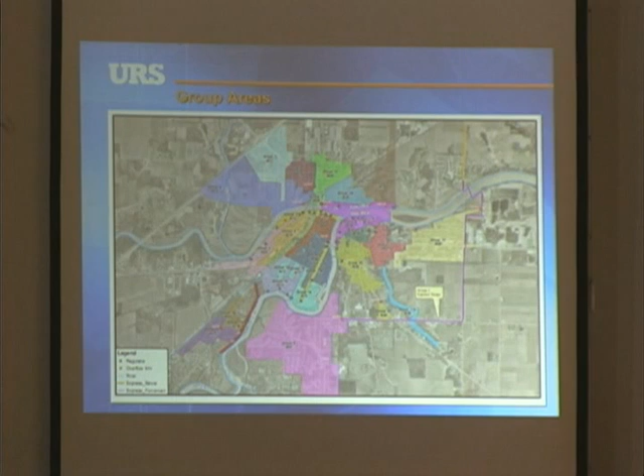Also, it's important to note that about 85 to 90% of their watershed is agricultural. So there's a lot of non-point source that's upstream and adding to the rivers and the pollutants. Simply put, we talked about the cost implication. Anybody that's doing sewer separation, it's very expensive. When you start doing sewer separation, there's all kinds of utility conflicts, there's pavement restoration. They've probably seen about everything you can imagine in the 6 group areas.

New infrastructure beside old infrastructure that collapses that needs rehab. So, not here to talk about this, but when you really get in there and think about sewer separation down residential streets, it really is a total rehabilitation of the area. So, once the original 50 million was projected out with these new costs, they were looking at something more like 120 million.

When you start to look at that, the mayor mentioned 2%, and you can see from this bar graph that their original program was 2.14%. When you inflated the new cost, it was going to be 3.7. And anything I've seen on CSO programs, that's off the charts, okay? 2.5% is extremely high. Also, we have the annual cost per household, where the 2% threshold, they were almost projecting as double, okay?

You can talk about 2% and all that stuff, but what really comes home to roost is when you look at monthly rates. In 2011, the average rate was about $62 a month. If they would have taken the program out to 2027, it would have been $145 for an average residential user. So not only do you have the extreme impact on the residents, but a community like Defiance has a lot of industrial and commercial customers. That starts to really weigh on those customers, and it inhibits them from attracting new businesses to the area to replace maybe the old industry.

But the more information an engineer gets and the more comfortable they are, they'll be more aggressive with their recommendations, okay? So the balance here is trying to get enough information so you can actually come up with some creative solutions, okay?

The other thing on the integrated planning is when we look at these alternatives, we have folks in our office, we have our treatment plant guys, they're gray all the way, okay? And then we have our collection system guys who are more conveyance and stormwater, which I kind of fall in. We're more gray and tend to float in the green occasionally. And then we have our green infrastructure folks that come from a different concept.

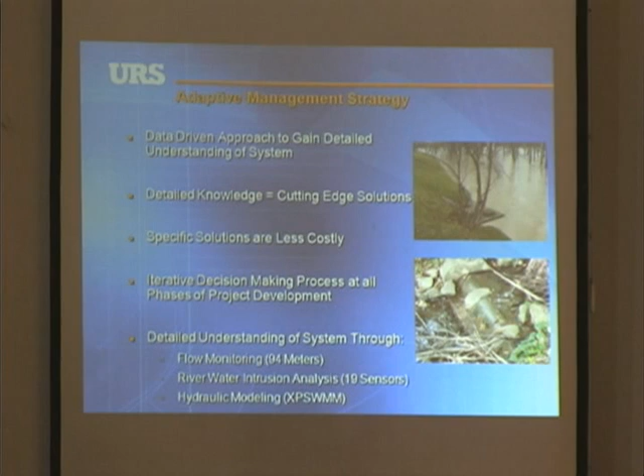But when we identify our problems, we set that team down, and you look at it and you try to come up with a common ground. And it's not always going to be a great uniform that has everything in it, but you'd be surprised at how much overlap you see.

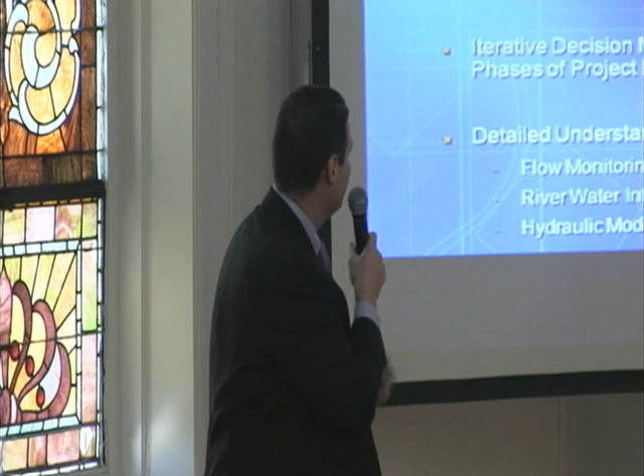The other thing is the iterative decision-making process. When you do long-term control planning, you're kind of flying at this 20,000 feet level elevation. You're looking at everything in the city, okay? As you proceed with preliminary engineering and detailed design, you have to be able to reevaluate where you're at, okay? For example, if you have a large storage tank, we all put together per gallon estimates based on experience, okay?

When you get into preliminary design and you start doing soil borings and you figure out that tank's in 100% groundwater, or that there's unstable soils, things change. And you have to be able to reevaluate that and adjust on the fly. Just because you lock something in on your plan, you have to be able to adjust as you move forward. So next I'm going to turn over to Tiffany, and she's going to talk a little bit about the adaptive management strategy and one of the projects that we've been able to yield from it.

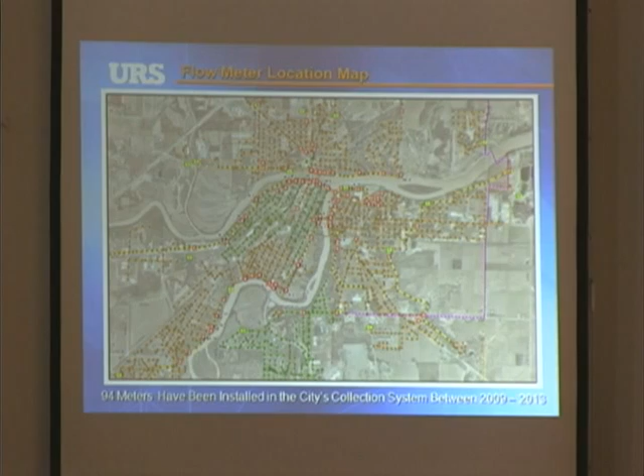Okay, so we performed the system characterization to basically understand the city's entire collection system. You guys hear me back there? This included flow monitoring, which was performed throughout the entire collection system. So you can see on this map here, all of the red squares are the flow meters that we've had installed in the system from 2009 to 2013. This actually included 94 total metering locations.

We had about 20 meters that were just continuously moved throughout the system. This actually included some post-construction compliance monitoring and also some SSES projects. So not all 94 of these meters were put in just for the long-term control plan, but we were actually able to use all of the data to calibrate our hydraulic model.

The city's consent order requires them to install temperature and level sensors in their infrastructure. The city actually has 19 of these sensors right now installed in both interceptors and river locations. And what these sensors do is they measure the temperature and level, and then you're able to look at that data and determine whether or not river water intrusion is occurring.

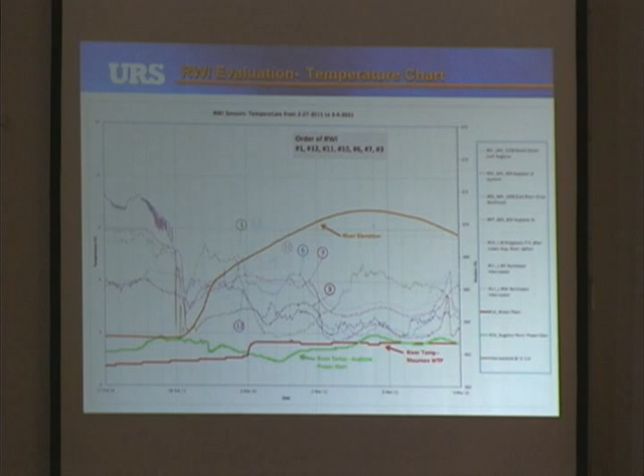Okay, this chart looks pretty confusing. So basically what this is saying is that there is a lot of river water intrusion in the city's sewers. I'm going to try to give you a breakdown of how we developed that analysis. On the bottom here we have the river temperature of the Maumee in the red thicker line, and the Auglaize is in the green thicker line. You can see the temperature on the left axis, it's about 2 degrees Celsius. This was back in February of 2011, so of course, it was pretty cold at that time.

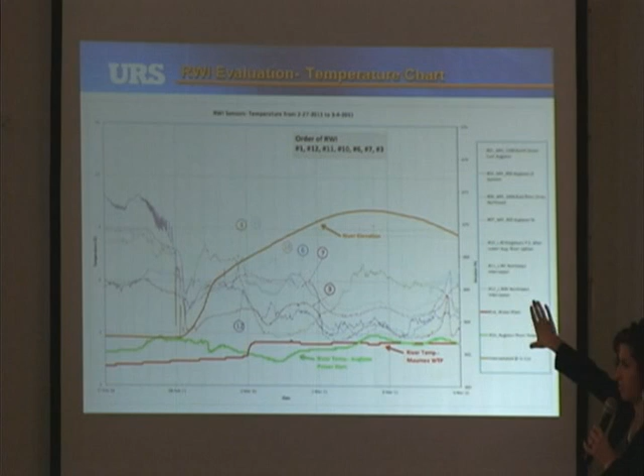Just above those lines, you see the interceptor temperatures in the thinner lines, the ones that are more sporadic and kind of all over the chart. And then you also have the river elevation, which is the orange thicker line, and that's plotted on the axis over to the right. So we actually do have elevation data from the USGS gauges.

So what you see here is, I'll come over to this side, the initial rainfall occurs right here in this location. I think this was February 28th. So you have the initial flush of the system from the catch basins and other sources connected to the infrastructure. You see a drop in the temperature and then a quick rise.

And then a couple days later, as the river elevation continues to rise, you see another drop in the temperature. And then this drop stays for a couple days. That actually shows that river water intrusion is occurring.

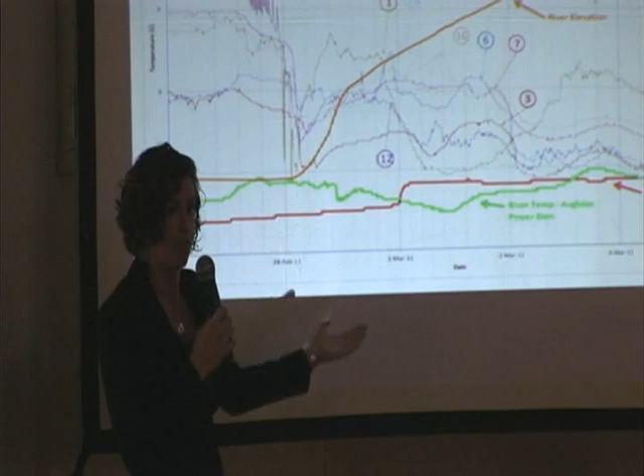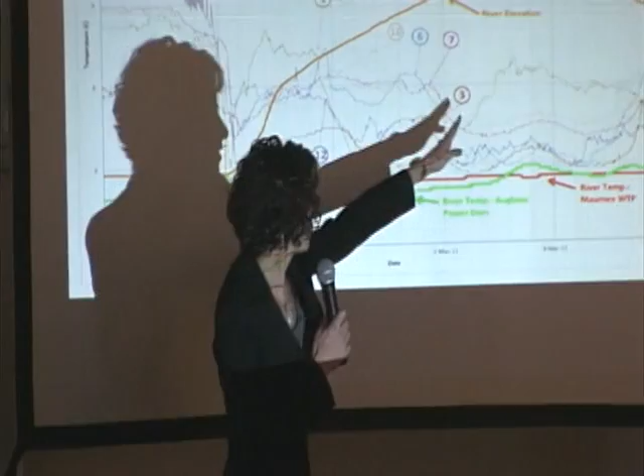So, for example, sensor number 1, you have the quick drop and then the rise. And then about a day later, you have another drop, and it stays down for about 2.5 days. So between here and here is where your river water intrusion is occurring in that sensor.

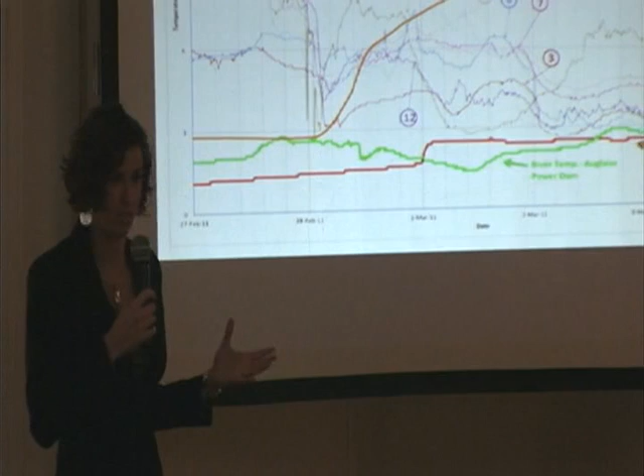So we also took this evaluation one step further, and we were able to identify the sequence that the intrusion occurs. Number 1 was first, and then number 12, and then number 11 happened next. It's a lighter blue, and then 10, and then 6, 7, and 3. So we're able to actually identify the locations that the intrusion comes in based on the time sequence of the temperature drops.

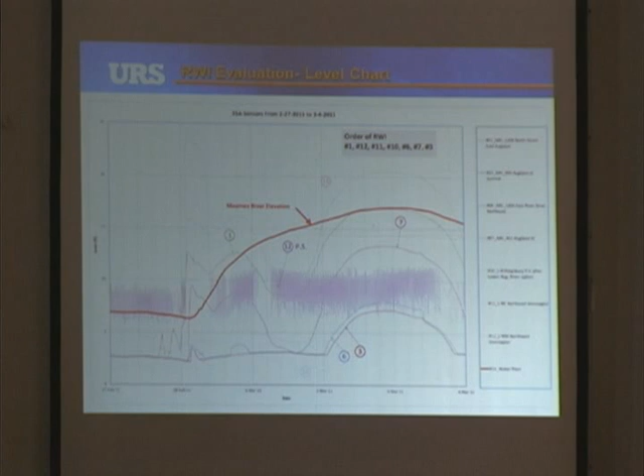The sensors also measure the level in the interceptors, which is used to confirm the conclusions of the temperature chart. You can see the trend. I know these are hard to see from the back, but the trend is generally the same as the temperature. The level has a quick rise when the rainfall occurs, and then it kind of rebounds in the system. Then as the river elevation continues to rise, you see in this area the level comes up and stays up for an extended duration, and that's where the river water intrusion is occurring.

Okay, the city's consent order outlines group areas that they have to take care of for river water intrusion. Two of those are groups 31A and 31B, shown in the area highlighted in purple. So what we did is, instead of just assuming that the entire area in purple has river water intrusion and needs to be addressed, we went ahead and took a look at the sensor data and figured out exactly where the river water intrusion is occurring.

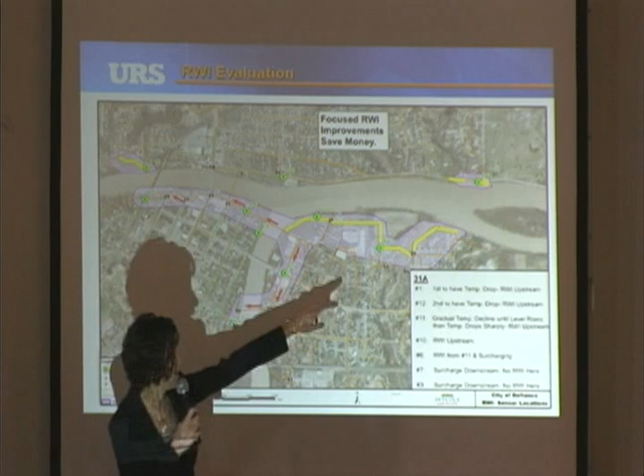So we highlighted in yellow all the areas where the river water intrusion is occurring. By looking at that data, we were actually able to identify that the surcharge being created by the intrusion at numbers 1 and 10 is actually backflowing into the areas to the west and south. So I have red arrows showing that the intrusion is not happening there - it's coming from other areas and backflowing into that area.

We're estimating that if we would have followed the letter of the consent order and rehabbed all of those areas, versus just dealing with the yellow, we would take care of the problem at probably 40% of the cost by just dealing with the yellow part. So using the adaptive management strategy, you really do save costs because you identify exactly where the issues are rather than doing a blanket approach and lining all of these sewers.

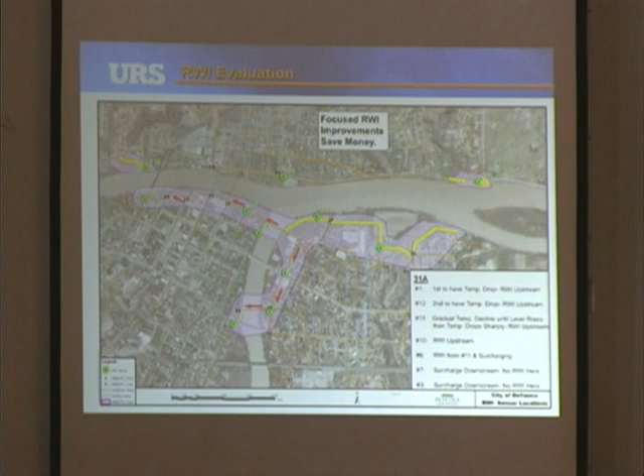So, in accordance with the adaptive management strategy, we came up with a project that addresses multiple issues. This is kind of a hybrid of the integrated planning approach in this area. What we have here is, of course, river water intrusion issues on the entire interceptor that we have highlighted in yellow. There's also 4 CSO overflows in this area, so we have the CSO compliance issues.

Also, the green box up there is the Kingsbury pump station. Anyone that lives in Defiance probably knows this is the biggest station in the entire city. The majority of the flows throughout the whole city are conveyed to this station. There's a lot of operation and maintenance issues at that station just due to the amount of flow coming into it, and anytime there's an issue, it creates a lot of backups and surcharging throughout the system.

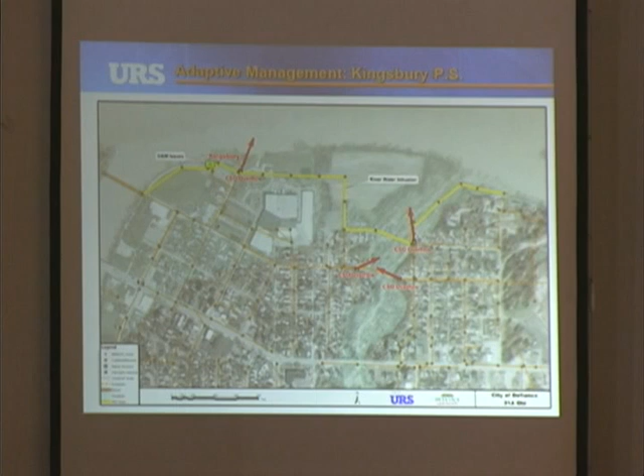So the adaptive management solution that we came up with was to relocate and replace the Kingsbury pump station and also to relocate the interceptor up and away from the banks of the river. So that would benefit, provide CSO control. It would eliminate river water intrusion. Also would eliminate upstream surcharging that is caused by both the river water intrusion and the operation and maintenance issues at Kingsbury. This will also reduce the O&M costs.

Right now, the city spends on average about $63,000 per year just in maintenance costs, when pumps go down and they have to rebuild. And also, Mike, if you want to give a little information about the electrical costs.

Another thing to look at is everybody wants to look at the FCA and say you have $20 million left. Well, during the system characterization, we look at and talk with Mark Leonard about his high capital or his high O&M expenses. By eliminating that pump station and reducing the electrical demand with higher efficiency equipment and eliminating the maintenance costs, he could be generating, or he could be spending an additional $1.2 million in this project area. When you look at $70,000 of O&M costs, the concept would be to reduce the debt, to reduce the O&M costs. So if you increase the debt service with the capital improvements, you're not increasing your burden on the FCA.

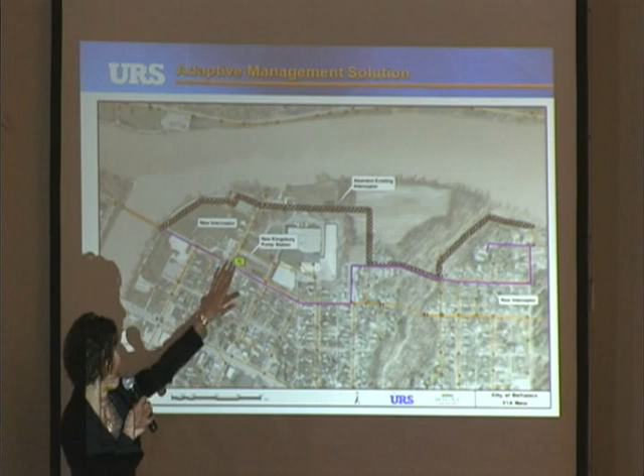So this is the new alignment of the adaptive management solution. What we did is we pulled the Kingsbury pump station up and out of its old location right near the river and relocated it up here to some higher ground, kind of out of the banks of the river.

We are abandoning the existing interceptor, which is shown in the black, hatched line. It was right along the river. It's easy to get river water intrusion in areas like that. And then we also have the purple, which would be the new interceptor, up to higher ground where you significantly reduce river water intrusion potential.

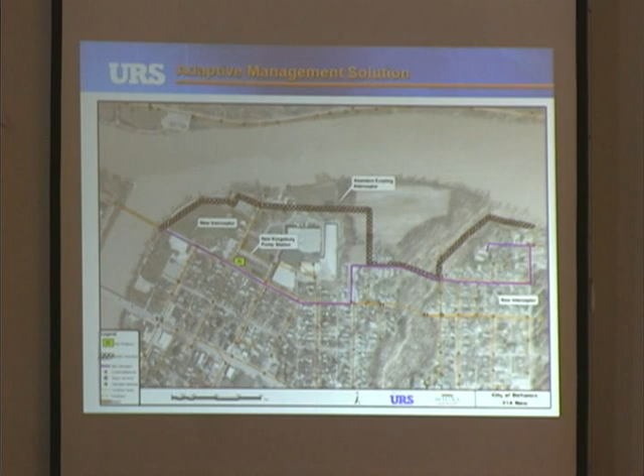And we're also going to be controlling the 4 CSOs in the area and then also the operation and maintenance issues at Kingsbury. So you're able to simultaneously address a lot of different issues with kind of an adaptive management, integrated planning approach. So I'm going to turn it back over to Mike for more information on the integrated planning approach.

Thanks, Tiff. Next, I want to talk a little bit about integrated planning and show a specific example that the city had a lot of success with. Once again, we're looking at the three main categories of CSO compliance.

There's all the typical suite of improvements that can be done, whether they're collection system controls or storage or treatment, pump station upgrades, relief sewer, storage basins, inflow redirection, high rate treatment, alternative river water intrusion. We spent a lot of time looking at the CSO component, so we feel like we have a good handle on that. Next is the MS4 stormwater requirements.

The city is an MS4 community. They also have compliance requirements associated with that. Some of the needs that come from that are improvements like stormwater conveyance, flooding, localized flooding mitigation, green infrastructure to improve the aesthetics and quality of life, plus dealing with the stormwater needs. And then the city recently has done a stormwater master plan that really kind of helped identify a lot of those needs as well.

And then you have the asset management. The city hasn't undertaken an asset management program per se, but we've, through the system characterization, looked at the significant drains on the operations budget at the pump stations and the wastewater treatment plant. So the key here and what we're doing is identifying overlapping solutions that address the multiple compliance with one project. So, okay, here's a wonderful map.

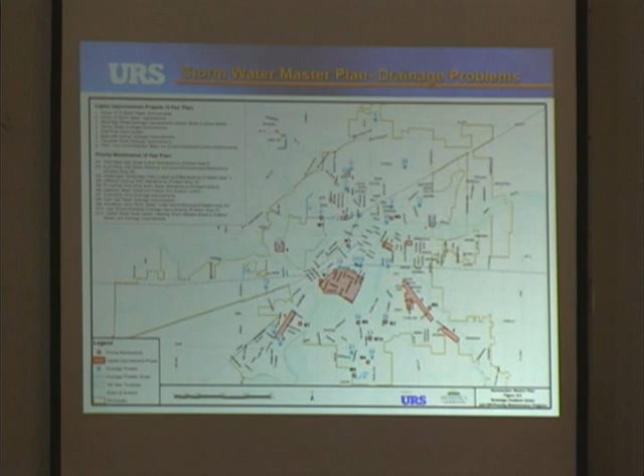It's probably confusing to look at from the audience, but this is the summary of stormwater issues in the city. The city sent out questionnaires to residents in spring of 2011, probably one of the wettest years in history. We sent out about 5,000 questionnaires and got 1,000 back. We also interviewed staff members with 25-plus years of experience in the engineering department, asking them to tell us where problems occurred over the years in stormwater. This allowed us to generate a priority map, which is shown here.

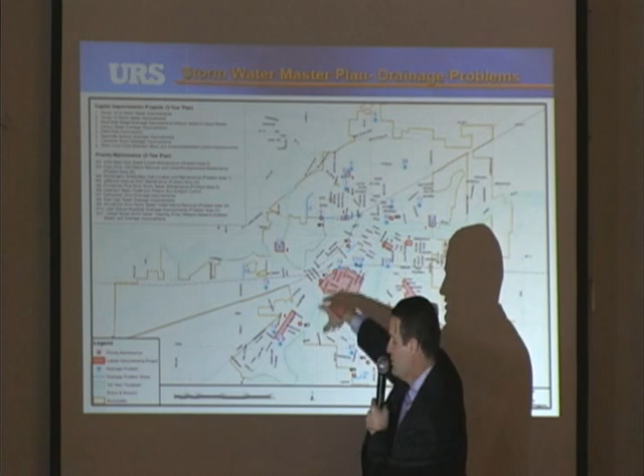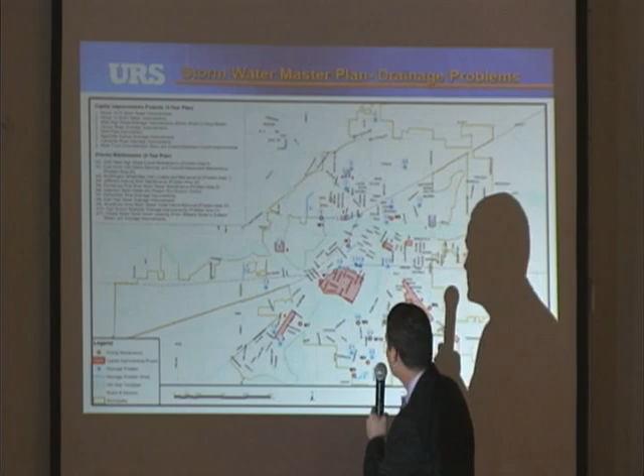It's actually really scary. The CSO issues we're finding with the metering data correspond to where there's stormwater problems, which lends itself to the integrated approach. The number one area was the viaduct along Clinton Street, which has both stormwater and CSO issues. The Ayersville Road area was another significant spot, and up north in Group 9, the South Auglaize Interceptor area had a bunch of issues. It was amazing how the CSO data and stormwater complaints all fell on top of each other.

So we had Groups 1 through 6 complete for separation. We were getting ready to move into the next group for CSO under the long-term control plan. We knew separation wasn't being cost effective, so maybe we could do something different in Group 14. We're under a compliance schedule, so we have to move forward and don't want to pay stipulated penalties. So we moved forward with an integrated approach project in the Group 14 area.

This was the number one stormwater problem area identified in the city, and it was also the next sewer separation area planned. The long-term control plan had $7.6 million allocated for this area. We decided we couldn't just go in and install new sanitary sewers throughout the entire area, because we'd proven that wasn't going to be affordable. We had to dig a little deeper until we got approval from the EPA.

So we went down that road. First, we looked at all the compliance issues, stormwater and CSO. The red arrows represent the CSO overflows, and we have six of them in the area, A1 through A6. We did flow metering as part of the SSES and identified A1, over here, as one of the biggest contributors, as well as A6.

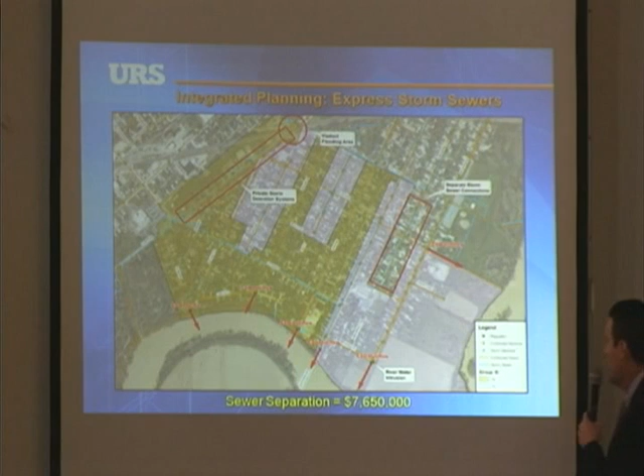We looked further and did field investigations to figure out why the data was so high. We realized the city had a storm sewer program back in the 60s or 70s to separate storm sewers - there was a great plan to provide all separate storm sewers. Phase 1 was constructed, shown in light blue, but phase 2, the outlet, was never installed. So we have separate storm sewers that connect into the combined sewer, which we quickly realized was a significant source of inflow coming into the system.

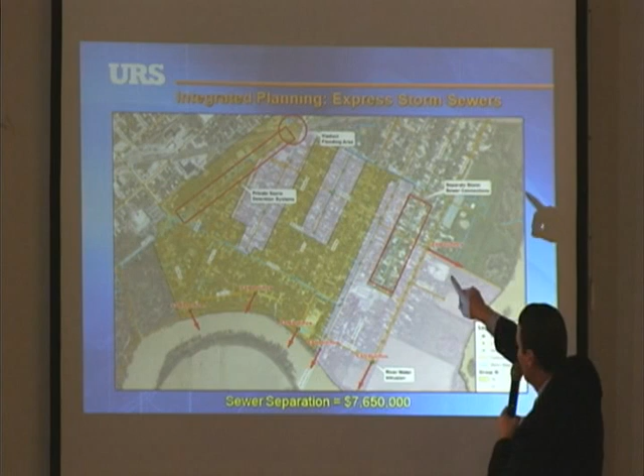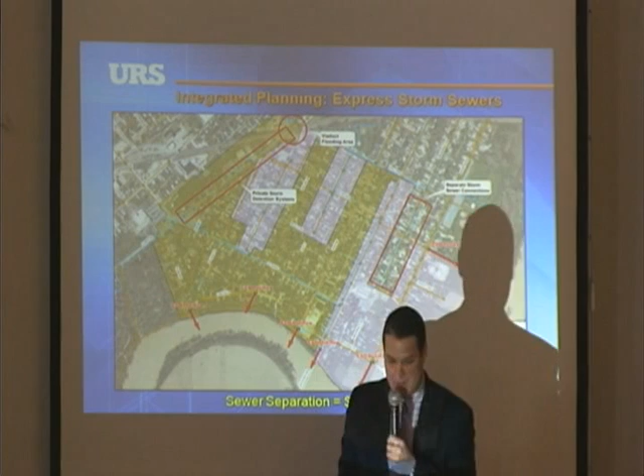The next area contributing to A1 was the viaduct area. This area is actually inverted - there's a high wall along the river, so everything flows back toward the viaduct. During rain events, Clinton Street, one of the main roads in town, gets shut down and traffic has to be diverted. There are also a bunch of Dairy Queen and small commercial establishments along Clinton Street as well.

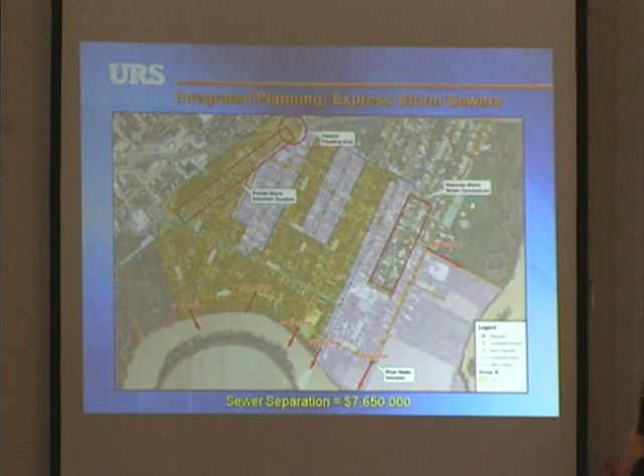One time it was raining and I was out there in the Dairy Queen parking lot, and the water was just coming up - they basically use the parking lots as an on-site detention system. We also identified a river water intrusion issue there during high river stage. So there's a lot going on in this area with both CSOs and stormwater issues, and a lot of money was projected for the area.

So we laid out and planned an express storm sewer. It was going to be an express storm sewer, and here you can see a picture of the viaduct.

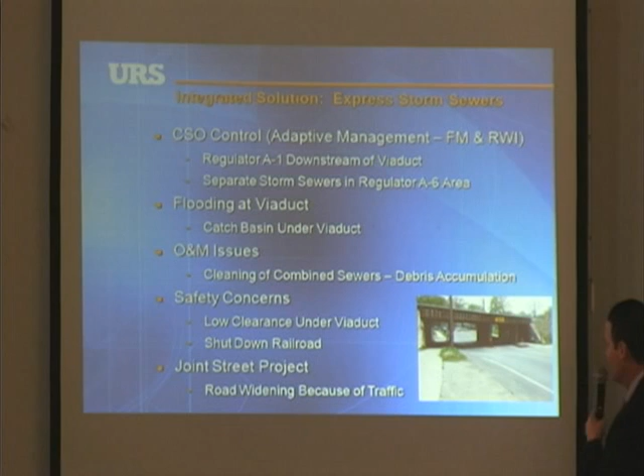You can see the depression and where everything sits. We were pretty pleased with the solution that we came up with because it took care of CSO control. It provided CSO control, and really addressed those two main regulators. And also there was flooding at the viaduct.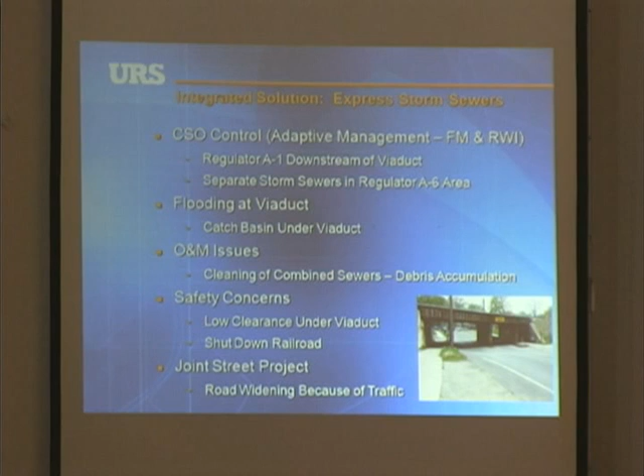The city also, and I wasn't even probably aware of all the discussions, there was a lot of discussion that every time something would hit the viaduct, it would shut the railroad down for an extended period, which created a lot of safety issues as well.

I know the city also proceeded with some funding through small city grants to do a joint street project along Clinton. So you can see that we're trying to do a lot here. We're taking care of a lot of different issues with one project.

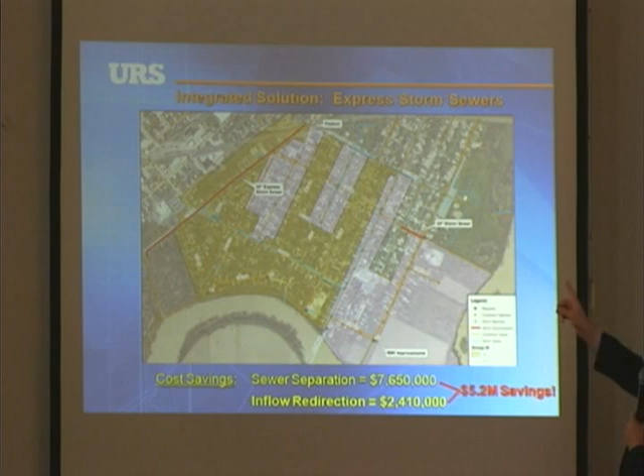And the project ended up being a big success. You can see we did a 36-inch express storm sewer from the viaduct down Clinton Street, being discharged. There was also a piece of storm sewer constructed over here to take that off, which addressed the flooding issues, the CSO compliance issues, and a lot of the other safety concerns. And you can see the savings was about $5 million.

So you can see that just by getting in and doing the adaptive management, figuring out the specific problems, when the original program was set out, it's like, okay, we got six regulators that are all active, we need to go through and do broad brush separation. Well, this approach - I think at the time the integrated planning documentation wasn't out, but I think it really falls under that very well.

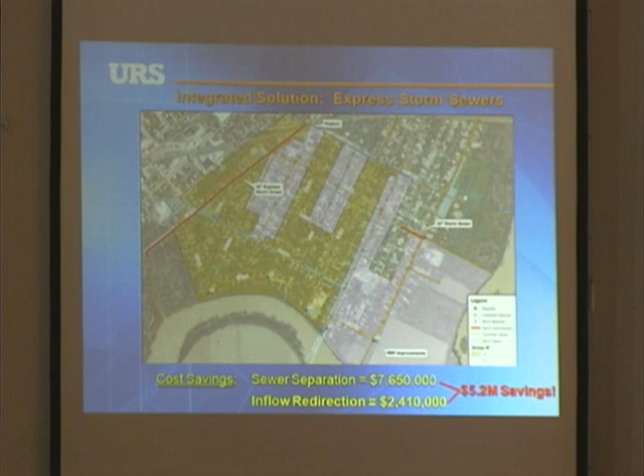With that $2.4 million, I've heard recently from city employees that there's actually no flooding at the viaduct anymore. So it sounds like one of the issues has been addressed. And also out at A6, which is up on the northeast side, the city is actually not able to even grab a sample from the overflow anymore because it's not overflowing. I think that's probably due to us getting the storm sewers out of that area. So it seems like the project has been a big success.

Okay, so we talked about the adaptive management and also the integrated solution. When you look at the amount of money that's remaining in the city, with the program affordability, we feel like we still need something else. Those are two very solid strategies that are going to be a backbone.

But we've taken an opportunity to look at a community down in Georgia that has a CSO program, and there's a lot of different things associated with their program which is very unique. They were able to get out in front of the Georgia EPA - I don't know what the correct acronym in Georgia is - but they were able to pilot and get approval of a demonstrative approach on a high rate treatment facility, which saved them a significant amount of money. I think it was saving them anywhere between 70 to 80% of their total program value.

So on the north side of Defiance, we have our compliance items that we need to work with. We have 4 CSO overflows, a siphon structure, a stormwater issue at the railroad crossing, a pump station, the Northwest Pump Station, and some river water intrusion issues as well in the interceptor.

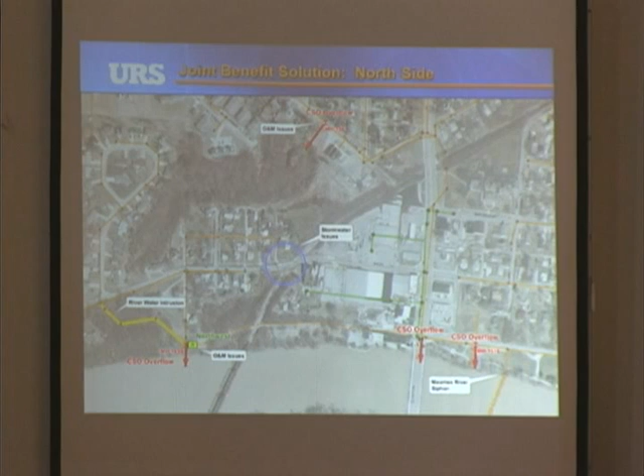These look very typical to what we've been talking about in all the areas, but this is how we're trying to look at it and say, okay, what can we do to take an integrated approach project in the area? So we looked at an integrated approach plus the joint benefit.

So what we came up with was a river walk, okay, that would have a relief sewer in combination. Because of the river walk location, we would be able to eliminate the pump station, which would reduce the O&M costs associated with that. And we would look at high rate treatment in the park area near the siphon structure.

So we would be able to continue conveying our dry weather flows through the siphon structure and be able to then treat our wet weather flows. So you can see that this project has a CSO control component. It addresses some stormwater issues, river water intrusion elimination, and some O&M issues once again with the pump station.

On the next picture I'll show you, that pump station is kind of through the woods and over the hill there, past the railroad track, so it's not the easiest to get to. And then we also have some riverbank beautification and pedestrian access.

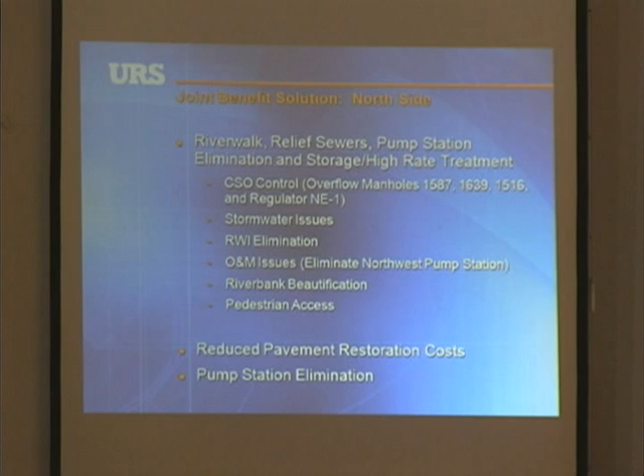Okay, so typical engineering would come in and say, we're going to do an interceptor, a relief sewer, and we're going to run it down the road. We're going to run it down Clinton Street, and we're going to run it over the siphon structure. Okay, Clinton Street's the main street.

Lee Roush, City Engineer, is probably cringing at the thought of Clinton Street being shut down because there'd be many upset residents. Also, I guarantee you when we got under that road, we'd find about 10 inches of concrete that no one would anticipate would be there. So the cost of the pavement restoration would be significant.

We would also upgrade the pump station with a new force main and convey it to this location. Then we would have jack and bores underneath the road here, which would probably be about $500 a foot and be very expensive to get across.

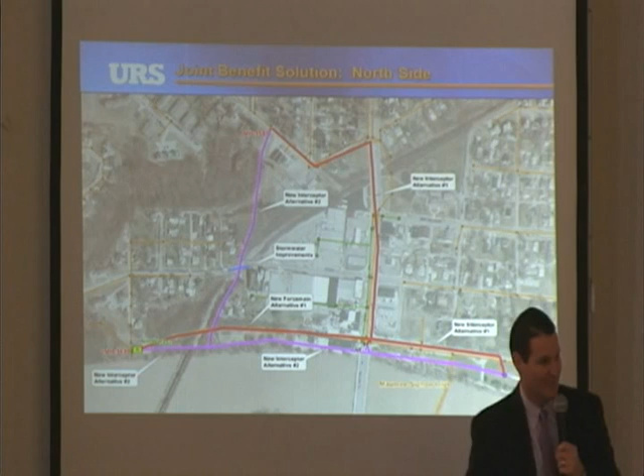So that would be your traditional alternative. It provides the sewers in the street, so it's easy for maintenance, but the cost of it, once again, the city has seen through their sewer separation and running in the streets that the costs go up significantly.

So the second alternative that we laid out was, okay, how can we work and try to reduce those pavement issues, the maintenance of traffic issues, and eliminate that pump station. I'll tell you what, if you're an engineer and you can eliminate a pump station, an operator is your best friend in the entire world.

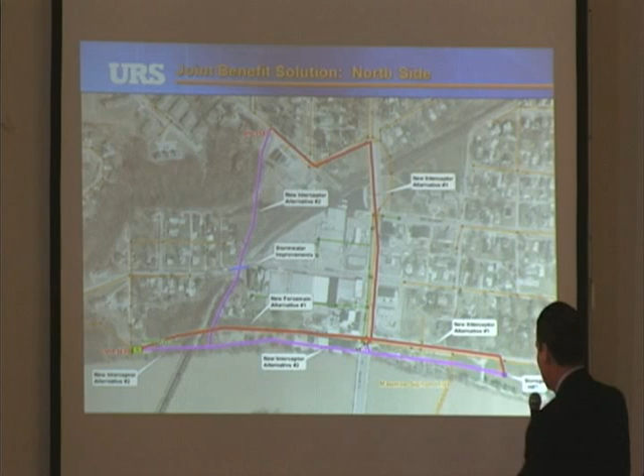That's one thing that we always try to do when you're out looking at stuff. So we looked at running the interceptor low along the river, okay, and following topography. These alignments, I think, cut like 6 to 7 vertical feet out of it, and the depth of the sewer is a big cost of construction.

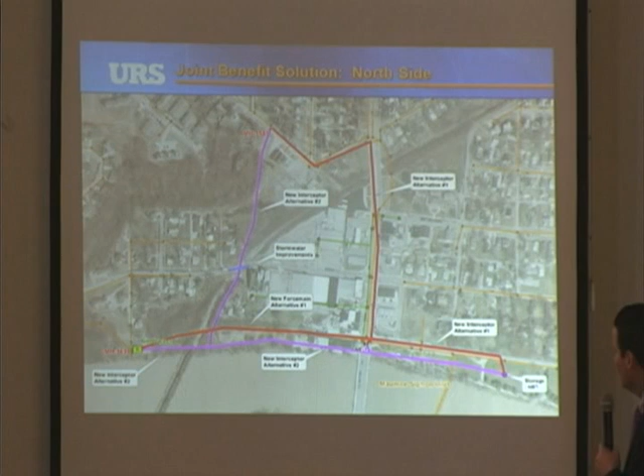And you can see that we took a look at both of these alternatives from a cost standpoint. So the first alternative, which is pretty traditional, is about $1.5 million. You have less interceptor sewer, but the cost of it's higher because it's with compacted granular backfill. You have a lot of restoration cost. You also have maintenance of traffic. That would be a tremendous excavation down there.

Alternative 2 is the Riverwalk, okay, concept. And you have more interceptor because we're taking the pump station off, but the unit cost of the interceptor is less because you're in native soils and you have compacted backfill instead of granular material.

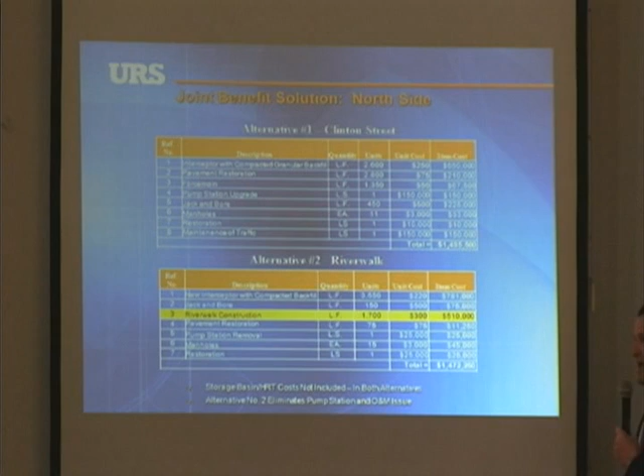You also have less pavement restoration and, associated with it, very minimal, if anything. What we do have in here is Riverwalk construction, okay? And there's about $500,000 in there. The cost of these are very similar. They're about $1.5 million. What this shows you is by putting the sewer at a lower elevation and getting out of the pavement and the maintenance of traffic issues, you can free up additional dollars to do a community benefit, okay? A community amenity.

Okay, now the city may say we don't want to spend the extra $500,000, we just want to bury it along the river. Okay, that's something that can be looked at. But what we're trying to illustrate here is that there is a way to provide community benefit, because that will be a very positive thing for the community and help gain acceptance of the program.

Okay, now we have some renderings. Okay, I got to tell you, these make me cringe. We have a graphic designer that does all this and it makes it look all pretty and perfect, and engineers usually deal a little bit more in grades and elevations. But you can see that we're looking at some kind of concept along the river where we would have some kind of path. Now, we'd need access to the interceptor, and so it would be buried along there.

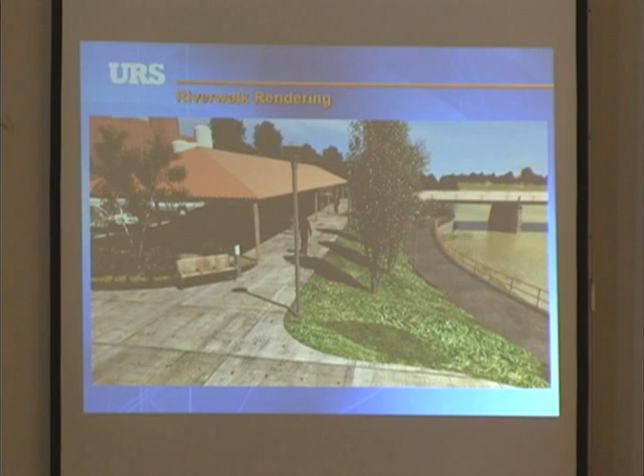And we're showing in here pretty concrete veneers on the bridge to match; these could be sheet piling walls. These are shown as kind of precast panels. The fine details haven't been worked out, but the concept is you have the money to come up with kind of a community amenity. So the Riverwalk would continue along, and here it's more of an asphalt kind of path. The piping would be installed.

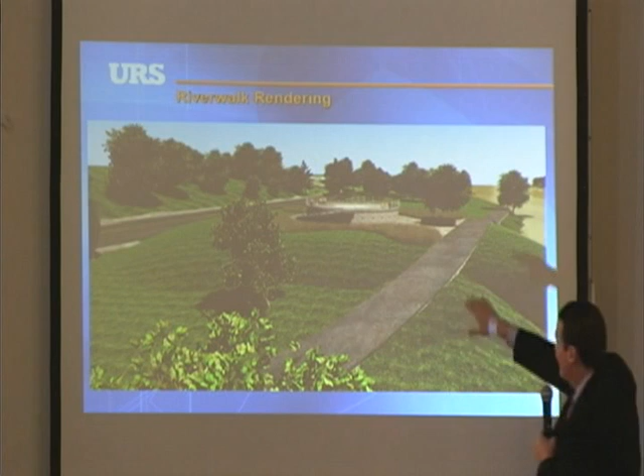Once we get under the bridge, we're going to be a little deeper, okay? Because the bridge is kind of the low point. We're going to be a little deeper, and we have here our high-rate treatment facility. You can see there's some buried tankage under the ground. We got some facility above grade for equipment and other things that would need to be maintained.

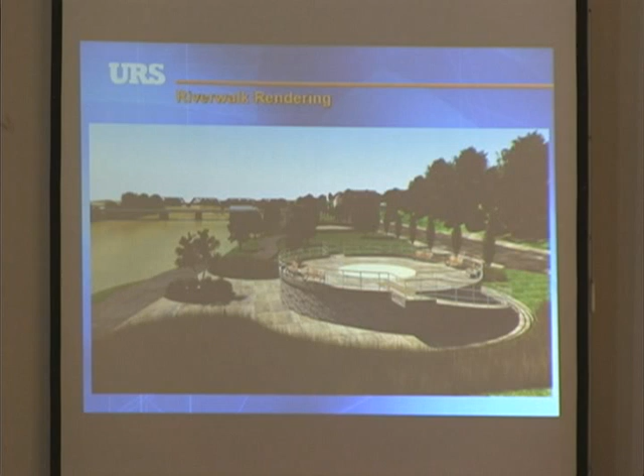Okay, but we also have a river walk. An outlook to the river. So you have benches and different stuff, a community amenity. So once again, kind of going through stuff and just trying to lay out some alternatives. I know that seeing the stuff from afar is probably not the easiest to look at some of the figures we had.

But what we're wanting to do is get into the long-term control plan update, and like the mayor said, look at some out-of-the-box thinking, because the cost is such a huge factor, and we're looking at the adaptive management strategy, the integrated planning approach, joint CSO riverbank beautification, proactive coordination with the EPA. As we develop the long-term control plan, we're going to be meeting with them to walk them through our ideas.

The last thing you want to do is prepare a long-term control plan and just submit it to the agency. These documents are very evolving, and to jump from point A to point B, it takes a while for them to catch up to the process. The other thing is the iterative decision-making process. Engineering-wise, you got to be nimble and on your feet and adjust to whatever conditions you run into.

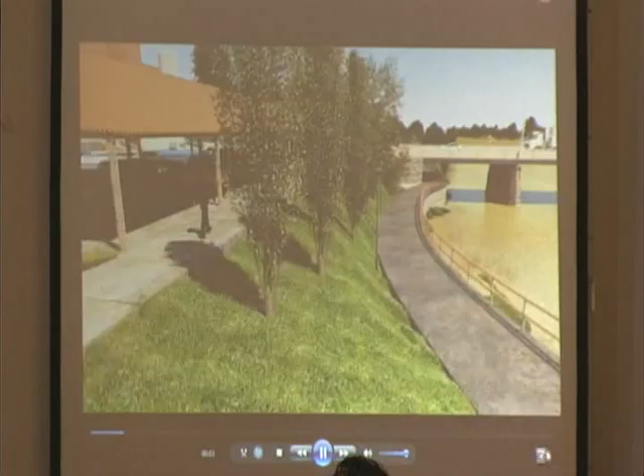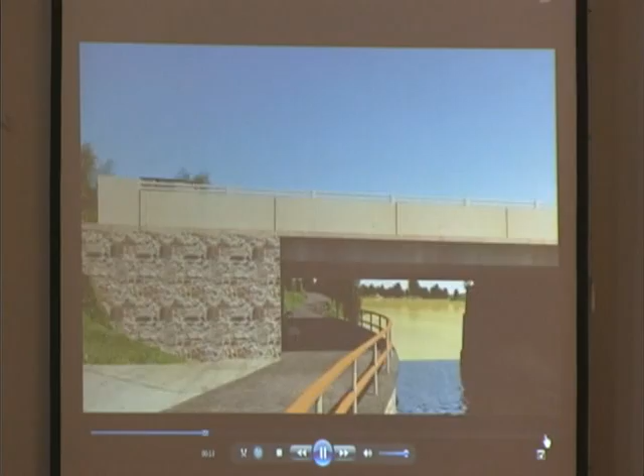But you can kind of get a feel for it, and I know there's going to be some permitting people in the floodplain that are cringing when they see this document, okay? But it's conceptual, for people to understand the kind of out-of-box thinking that is being looked at when you look at these different components.

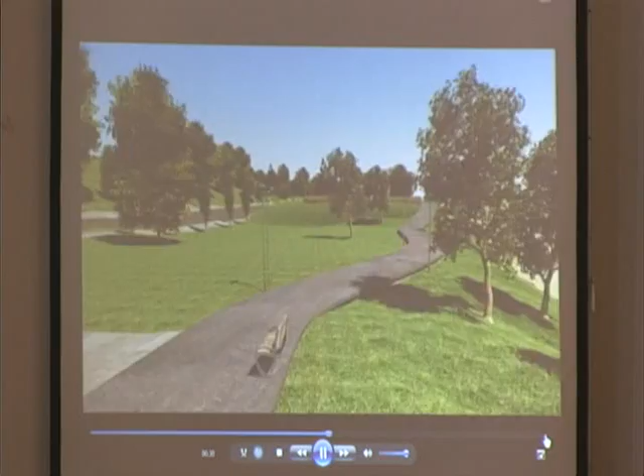We were gonna try to get a picture of the mayor riding his bike down there, but we weren't able to quite get that. But you can see that the concept would be to fit it in the area, and we'd obviously have to work on some odor control strategies if we're going to have people on top viewing the river.

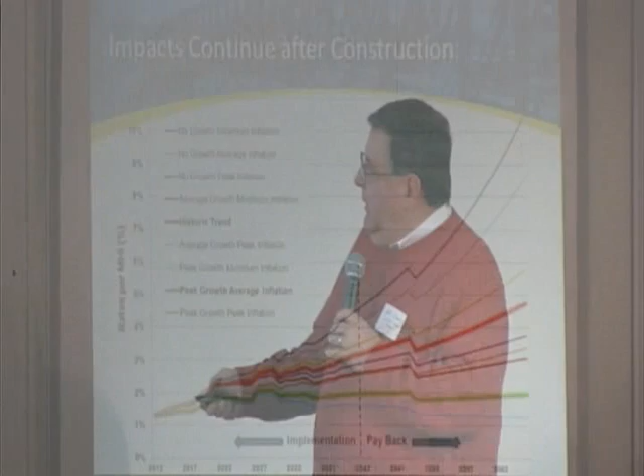We have implementation up to this point where we're building it, but unfortunately or fortunately, we've got another 30 years or more out here where we're going to be paying off the debt service, the debt structures, to do this work. And if, in fact, we don't see peak growth with average inflation, if we have any of these other scenarios, then in the payback period, the thing goes out of sight.

So part of our concern is how do we deal with these potentially changing economic conditions? We feel the integrated plan is the avenue to be able to address these issues. Because as they occur, as I'll point out, you have an opportunity to go back and look at adaptive engineering. Go back into your consent decree with a reopener. Explain this to the agency so they understand what takes place. And it may mean if we don't see the growth back in here, we may have to make some adjustments because we're not seeing the growth to meet this curve that makes this sustainable.

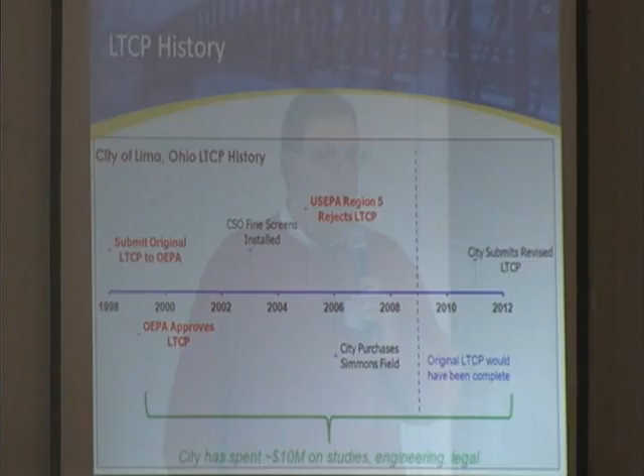US EPA came in 2005 and did a 9 minimum control audit. As they got involved in what we were doing and what was in the plan, they brought us to Chicago and said we need to negotiate with US EPA, because they really weren't satisfied with where we were at and how Ohio had approached this.

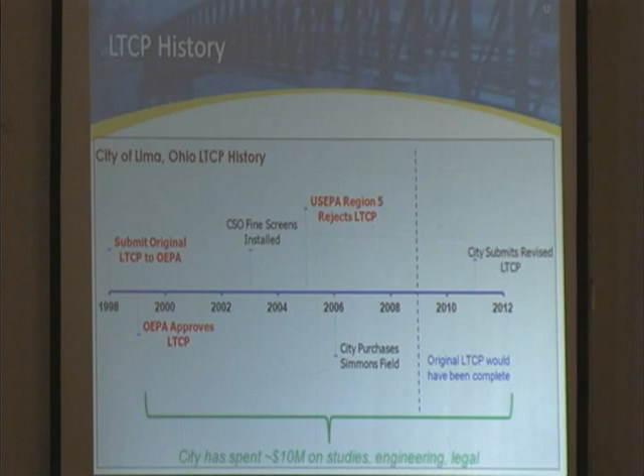So since that point in time, we have been negotiating. Early on it was principally just with US EPA, but more recently we are fully engaged with both Ohio EPA and US EPA.

Our long-term control plan, I will say, the early tenets of it match the integrated plan type process that the agency has defined as the guiding principles in the integrated plan. We were one of the first in the country to submit a request to Region 5 for an integrated plan, and we've been building that structure up until now.

We went through the draft processes, and it was very important that US EPA came to Lima, I think in May of 2012, last year. I think it was very informative. A lot of times when you go over the telephone or through emails, you miscommunicate, the communication doesn't go right. This process of coming to the community has worked very, very well for understanding.

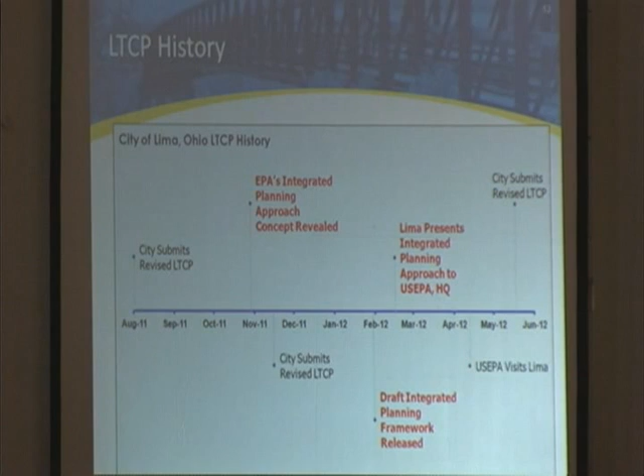We have the benefit with Ohio EPA because, as you know, when you operate treatment plants, every year Ohio EPA is at our doorstep. They're always there, basically looking. Tom Boffenbarger, I think I could recognize him anywhere. But I think it's good to have that personal face-to-face contact to really clarify issues.

Just to give you an idea, most of you probably understand this locally, but this is the Ottawa River Basin. It starts over near Ada, flows up through Lima, then up near Kalida, in this area here. It joins the Auglaize, and then a short distance up comes into Defiance, into the Maumee.

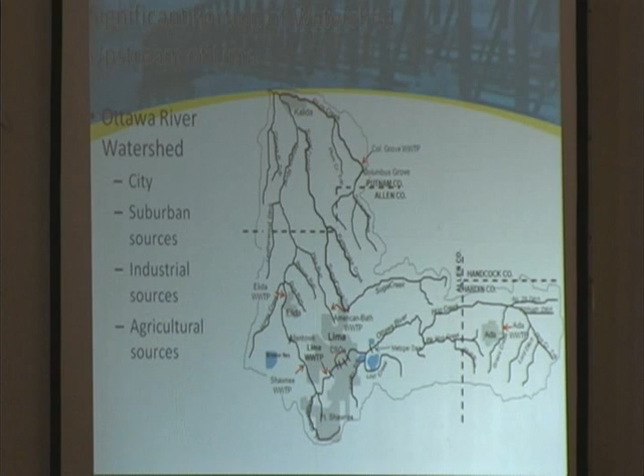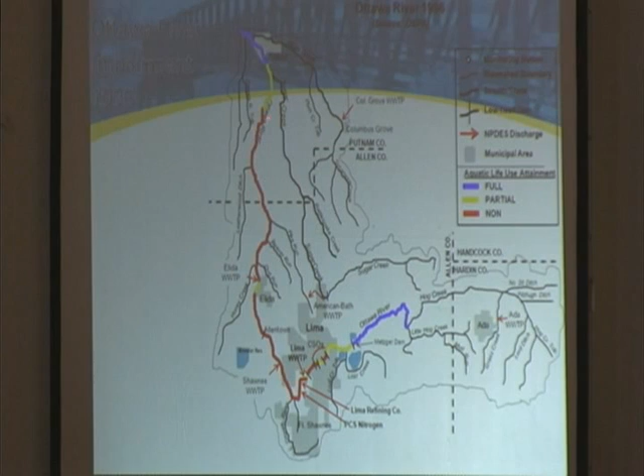I think this is important. This is a 1976 assessment by Ohio EPA showing only about 25% of the Ottawa River was in full warm water habitat criteria. The main stem is classified as warm water habitat throughout. There are points in secondary areas modified because of agricultural issues. But a couple areas were basically partial, and a major area here was fully non-compliant. It was receiving our sanitary sewer overflows, combined sewer overflows, and also some non-sewered areas.

In 2010, as part of the TMDL, and there will be probably sometime this spring, the total maximum daily load allocation work will be done, probably by June I've heard. But what has happened is that with improvements done over that 10-year period, basically 75% of the river now meets the full warm water habitat.

I identify, at least in my mind, what is really causing that. Two things. About right in this area here, there was a major non-sewered area that had a whole bunch of community housing out on septic tanks. We knew from water monitoring that there was all kinds of fecal loading getting into the stream. That's all been sewered now, and it all comes in and receives full treatment.

I'll be frank with you, we put in those fine screens on our 5 major CSOs. Those are not primary treatment, but they get very, very close. We actually get a lot of biological removal just by the screening process, keeping it in the sewer system before it gets out there. And I think that is the reason why we've seen major improvements.

We have an area of concern in this little corner right here. It's about a 1.5 mile stretch downstream of our discharge, the Lima refinery, and the PCS nitrogen plant. That is the only area now in the Ottawa River Basin, directly in the main stem, that is in total non-compliance, and we are going to be working on that.

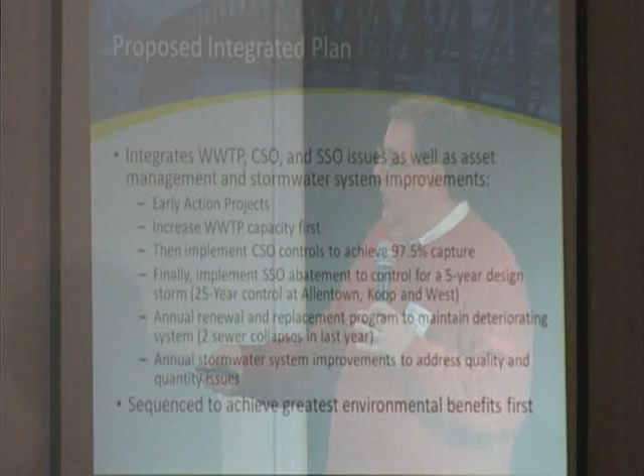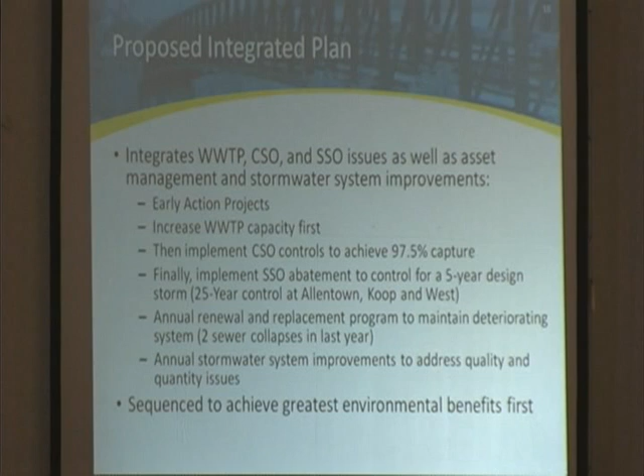So what we've done, in our negotiations, is agree to these 3 main priority SSO basins that have more potential for direct contact with residents, putting those on a 25-year design, with the balance of them—I think there's 5 more—at a 5-year design. And then we have a renewal and replacement program. It is the asset management along with the stormwater, sequenced again for the greatest environmental benefit.

This is the proposed plan. Totals just under $150 million over 28 years, with 87 million to be spent in the first 12. For the plan itself, using US EPA guidance, we are at 2.58%. We're higher than the 2% that the CSO rules actually mandate. But we feel this is the best for the community.

Right now we have, on a monthly basis, I think it's $5.05 or something like that per month. The residents basically pay for the stormwater operations of the stormwater utility. In addition to that, every impervious house pays an impervious charge, and industry or large churches and so forth have an impervious service calculation that they pay for on an annual basis.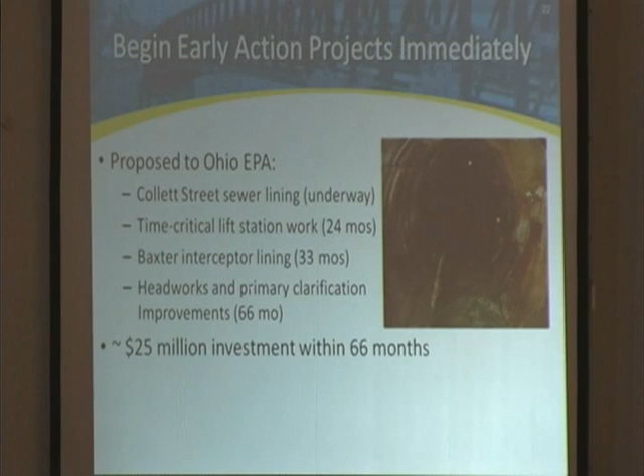We're also starting the Headworks project for primary clarification improvements. One of our issues was that some of those processes dated to the early 50s. But we couldn't move ahead with repair work until we understood what our long-term control plan was going to present, because we didn't want to build something at 53 MGD capacity and then realize we had to maximize flows to the treatment plant at a higher capacity than we built - wasting money. So getting these things done now is allowing us to move ahead with our process.

The result is that we got $25 million within the 66-month timeframe of these processes. The Headworks will be designed for 70 million gallons per day. We are going to maximize flows to the treatment plant, increasing flows to help continue to dewater and take pressure off our CSOs, getting the plant to a point where we can provide a higher level of treatment.

The wastewater treatment plant - need another drink. Your ears probably need a break anyway.

I'll point out, before I get into the technical areas, that we have retained 3 engineering firms to help us do this work. You heard from Mike Fromer from URS, and Tiffany.

Using high rate flow treatment, you're not going to get secondary treatment. Now there's some new biological processes bordering on that out there, but we believe, again, this is adaptive management. It's offering a new concept, and particularly under the integrated plan, this is where we can save real dollars. Now, at the end of the day, if these things don't quite prove out the way we expect, we're agreeing to put in a microfilter, or do something behind that, if we don't see the full treatment of this process be fully compliant.

And then again, we're basically rebuilding the front end of the plant to go from 53 to the full 70.

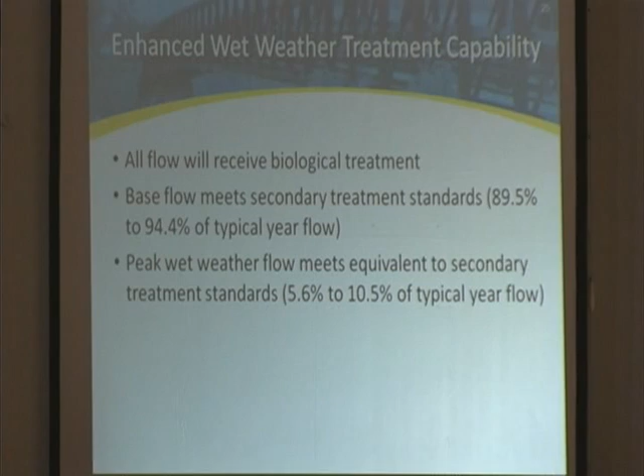All flow receives biological treatment, and peak weather flows will meet equivalent to secondary treatment. At the higher rate, if you're a CSO city, in the Clean Water Act CSO rules, there is consideration if you're doing high rate treatment or peak treatment. This, in my mind, is part of the strength of this integrated plan, because we as operators are saying to the agency, there are means within the Clean Water Act that allow you to give us consideration. This is one area we're asking for that consideration. It's really meaningful to the rate base and gives us a better level of treatment than going down some other conventional process.

The CSO review: we will be building a new 13 million gallon CSO storage tank. It will require a relatively large pump station to dewater that tank. We will also modify our real-time control to equalize flows to the plant.

We will have a small sewer separation that will eliminate 10 of our CSOs. As part of that separation, we're working with our stormwater utility so we don't just put in a new storm sewer. We'll look at stormwater treatment, infiltration areas, or other means to improve water quality in that area, rather than just moving stormwater flow out of the combined system into a sanitary or storm sewer system where it's transported straight to the stream. We'll be working with them on developing those concepts.

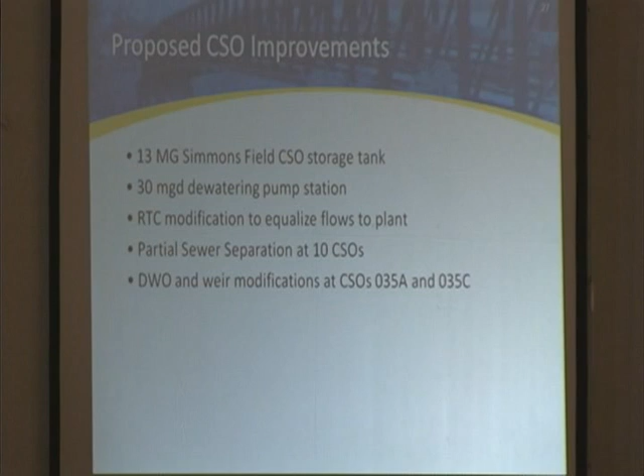And then the other one is the dry weather flow - basically adjustments at a couple of lift stations that get us to the higher level of capture we needed to reach. So this is the result we're at.

We're basically at 5 CSO overflows per year, ranging down to the only CSOs we'll have when we're done. Right now we have about 19 overflow points, and we will eliminate that down to 5. So not only are we reducing the time, but the average overflow of these structures is probably anywhere between 30 and 40 times a year currently. It'll go from that point down to 5.

97% capture. And this is a picture of one of the screens - they have fine screenings inside a horizontal screen that does an excellent job making sure we're not putting floatables out into the system. The screens themselves are about 3 millimeters apart, so it really keeps a lot of stuff contained.

Tom was one of the ones from Ohio EPA that reviewed our application. We actually got agreement with Ohio EPA that we're done doing anti-degradation reviews. The efficiency of these screens removes so much BOD loading out of the stream that we've got enough credits that we can go clear up to the tertiary capacity of the plant, which is 18.5 MGD. That's how efficient these screens are at this point.

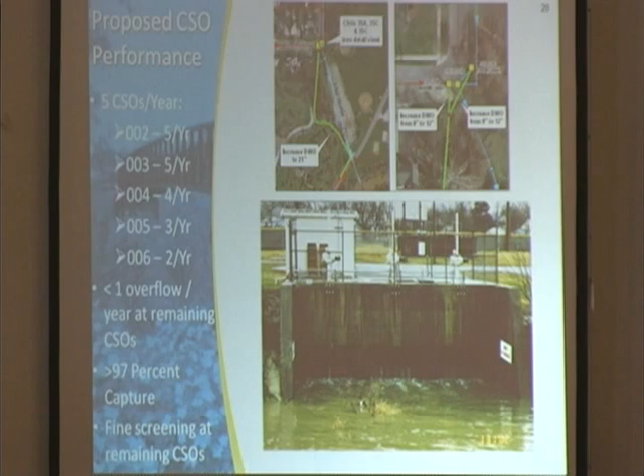Just as a point, this is where the screen will be located, at the lower end of our interceptor. Back in the 70s, we put in an interceptor that started about 3 miles upstream of this. Down at the low end, it's 118 inches in diameter. These are the river gates shown in the previous picture's structure. The interceptor comes this way, and this is the overflow point, and that basin is going to sit about right here, associated with it.

We had a challenge here because we were in quite a discussion and debate with US EPA. When we first looked at this site, we did not have the full geotechnical work done. These hatch marks are the results of geotechnical evaluations drilling down to bedrock. This site on the east end is an old industrial commercial landfill. When we first did projections on this tank, we felt that if we were in this area, or if it extended clear over here, we would need pilings over 100 feet deep to stabilize and keep the basin in place.

But we were fortunate - as we recently completed this geotechnical work, we found out we could put the basin here, where the bedrock is only about 7 to 12 feet deep. So in reality, our extra expense now is that we'll have to tear bedrock out to put the basin in. But it's good news, because it's going to give us a very sound foundation to construct that.

And I guess I will say, when we didn't know that, we had differences in what the cost of the structure was going to be. We originally were proposing a 13 or a 9 overflow per year versus the 5. We got in discussion with the agency. Their engineer said, well, you should be able to build a basin at 13 MG that would give us the 5 overflow. And I'll be frank, we went back and forth.

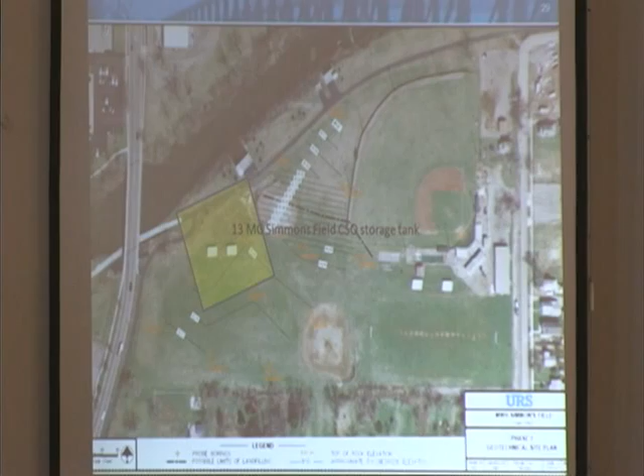But that is kind of outside the norm, where normally you get your engineering evaluation. That's like a class 3 or class 4 evaluation. You're right at the point where you're ready to construct something. But we needed to know that information a lot earlier than when we got it. At the end of the day, this is where we're at. As I mentioned before, from a technical standpoint, I think we're very, very close with an agreement with US EPA and Ohio EPA.

Well, we went out through the work that URS did for us. We got all that corrected. We went out and did downspout tests and all that stuff, and I think since my tenure with the city we've done that 3 times now, and so we probably got 99.9% of the downspouts off of the system. Now there may be somebody that has a trap that doesn't allow the smoke to come out of the downspout at the top, stuff like that. You find that out.

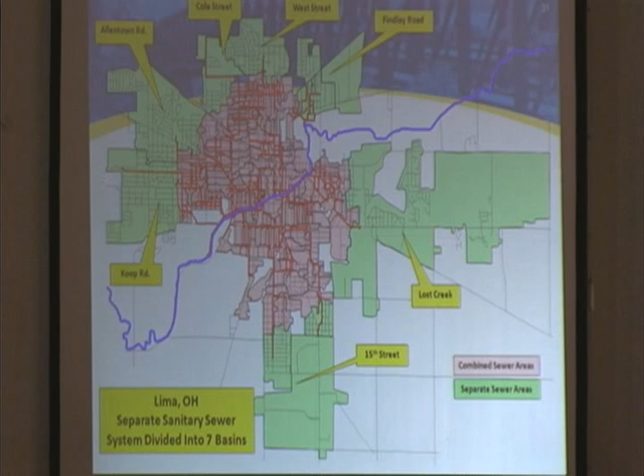But in any event, we are doing what we call a store, pump and treat, and that's why we talked about the 25-year storm, the 5-year storm. And these areas, and this is one of them, Allentown's the other one, and the other one is, I have to think about, Cole, I think it is. It's these areas principally right in here is where we will capture the flow volume of a 25-year storm.

And then we will basically, I guess I'll move the slide here. In these areas, we are going to be capturing this much volume. And Tika will tell you that the EPA really doesn't recognize it as a design storm per se. It's that volume of flow. It's the reduction you get from that. So what we're going to be doing when we're done, we'll be capturing just under 10 million gallons and capture what was basically an SSO, and that will get full treatment at the plant.

And that basically is a cost of $30 million. I'll tell you, I about fell off here the other day. I kind of lost track of it, but I went back into our original plan that Ohio EPA had approved, and we had design concepts. That number was $5 million. Now we're at $30 million. But it's the higher level of environmental control that I think we're all looking for, what it's going to take basically to meet the environment and protect the residents.

So here it is, our program. Basically, it's 147 million. The large basin, upstream separation, real-time control. We're going to even enhance. Right now, we can capture 33/100ths of an inch of rain, 1/3 of an inch, when it rains, basically in a 4-hour storm, and not put a drop of that in the river. It all goes to the wastewater treatment plant.

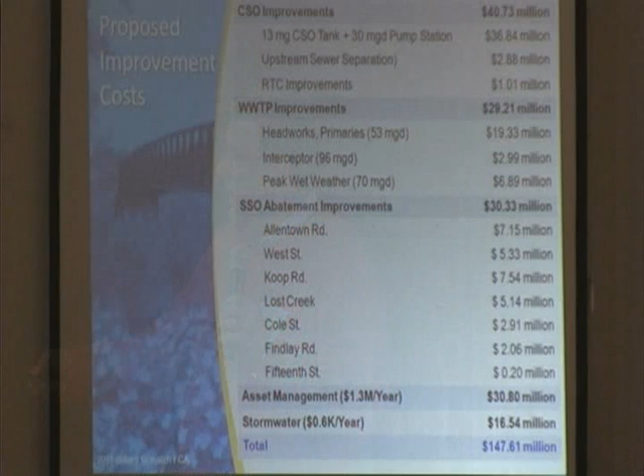We use flow equalization, flow storage. We bring it there to provide that level of treatment. And of course, that goes up to the higher number. The wastewater treatment plant is $29 million. The asset management basically is $1.3 million a year as an average, which we'll spend over that 28-year period, over $30 million. And then we have forecasts to go clear out to 50 years that will continue that pace. And then the stormwater is $600,000 a year. $16 million will be spent.

I will tell you, we expect a lot of pressure, if you're not aware of it, but probably US EPA out of headquarters sometime, I think I've heard sometime this summer, the new revised stormwater regulations are really coming out, and if you followed any of the discussions that are happening on that, these stormwater regulations I think could be very, very significant for communities. Another real reason for the integrated plan.

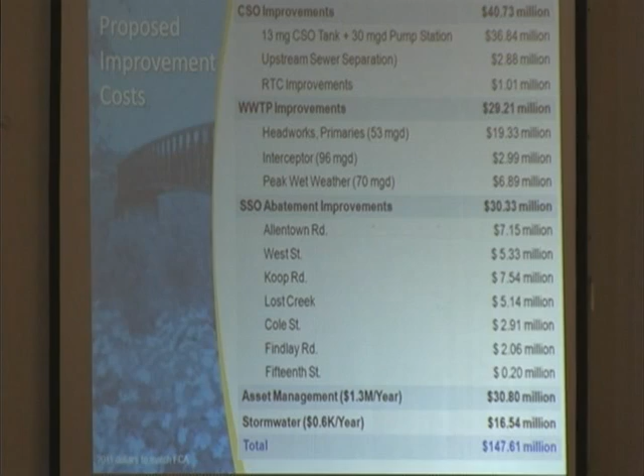For us, when we put that on our platter and we basically commit to do that through this consent decree, and we're at a balance of $50 a month on our sewer bills, and all of a sudden here comes another $10 million here, another $10 million there. How are we going to manage that? Is this just going to be a pile-on? And I think the integrated plan gives us that capacity to basically work with the agency and say, now let's define what has the highest priority. The ball game has changed. I mean, this environmental process is not static, as all of us know.

I'll be frank with you, when I started in this industry, we were measuring in parts per million, milligrams per liter. Where are we now? We're in parts per billion. I think we're even going above that. And every time that gets out there, some scientist is going to find something that says there's an impact because of that particle out there. Some doctor, some research is going to find that, and that's going to come back, in all reality, probably as a mandate.

And so for us, basically having the integrated plan is the way that I think that we can discuss with the agency what is the most important thing that we need to be investing in. And over time, then you use the adaptive management and processes like that to make this thing work. So here's our integrated plan.

The CSOs, I kind of mentioned some of this, is substantially higher than the SSOs for the volumes. We do not have any chronic dry weather overflows. We do have some SSOs that happen, and some grease gets out into the sewer system and plugs it up, but we do not have any type of chronic flows there.

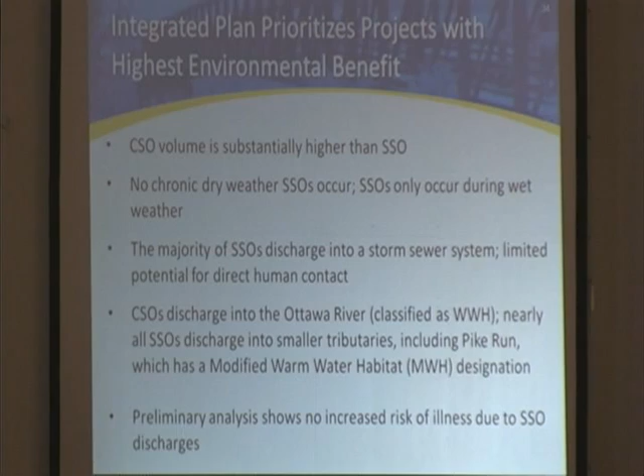We're looking at the SSO and more of a direct human contact, which I talked about, and then our CSOs, Ottawa River is a warm water habitat. All the other ones are already at warm water, and then the preliminary analysis shows we don't have any anecdotal evidence that says that people are getting sick from our SSOs. Working with the health department, looking at those type of records. Not saying it doesn't happen, there's just no evidence that basically says that somebody's assigned that.

And then this is what we're doing with our rate structure. We are moving to a flat rate structure of $50 a month. Right now, just real briefly, you probably can't read that, but our minimum user on the inside of the City of Lima is 300 cubic feet. From 0 to 300 cubic feet, they pay. The 1,000 cubic foot inside right now is $38.

Will go to $29. They actually come back down a little bit because there are 28 years of rate adjustments that occur once we get this first curve. Once this is done, it basically flattens everything. It goes to a flat rate, and then for the inside, builds up on a rate so we reach that point. Now the outside customer, the 300 cubic foot guy, basically was $26 a month last year. Now he's going to be at $45.23.

We're pretty much going to match where the county is right now. I mean, being frank with you, from our standpoint, we're taking away the leverage point that a resident out in our outside base can run to the county commissioners and go, I want in your system. Well, what's your system? Your system's $45.

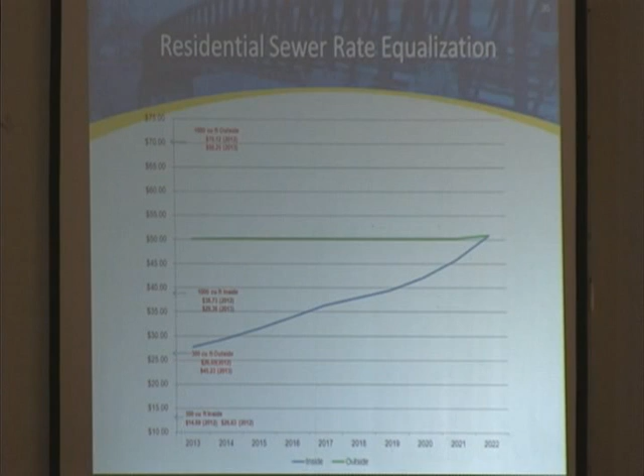And then this, as the last thing, is a relationship to the median household income. This line here is the 2% of median household income with no growth. In other words, we just stay right at $50. And that construction program basically takes us up so that we'll be well above that for the charge.

If we see the growth that we projected, then we will keep this whole thing affordable. So part of our integrated plan issues, and the next phase we're at, is another draft revision from our attorneys working with the EPA attorneys to try to come up with the terms of this thing.

What the integrated plan gives us is a vehicle to know that we can do our work up through the wastewater treatment plant. We've already committed to Ohio EPA, it's in our NPDES permit, we're going to spend those dollars, $30 million doing that work. But six years down the line, this basin, that $40 million basin, is going to come due. We're going to do the actual engineering design and get it to where we know exactly what that thing costs.

But at the point in time that we look and don't see that we've got that growth curve, and we haven't seen the affordability, we haven't seen the resources of the community capable of covering that, then we're going to go back to the agency through the integrated plan process and say, look, we need a reopener, we need some adaptive engineering, we need some means to basically make this thing work.